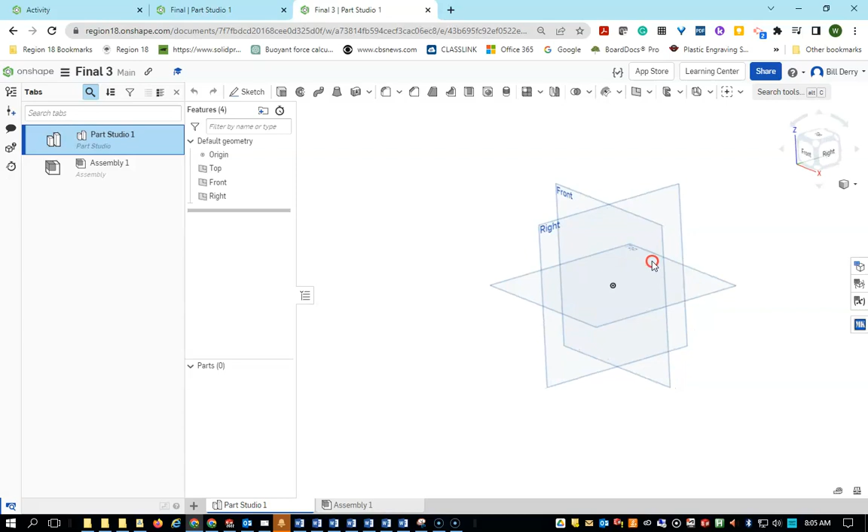All right, so we've got a new part studio here. I want to get drawing for our part. I'm going to start on the right side, so I'm going to grab a sketch and select the right plane. Let's just click on this so that we're looking normal to it. I'm going to show you how I got started here.

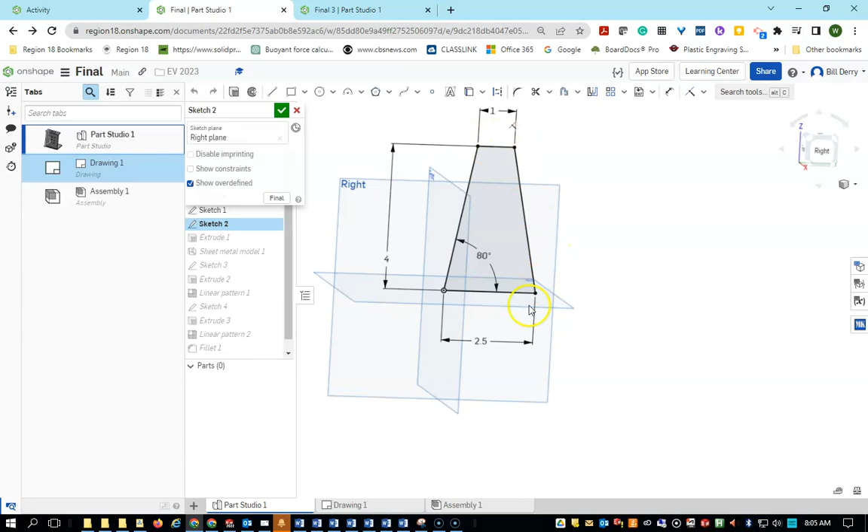I just started with the origin, 80 degrees, 1 inch over, and I made this shape. So we're going to go ahead and do that to get started. This is actually an interesting way to do a sheet metal part.

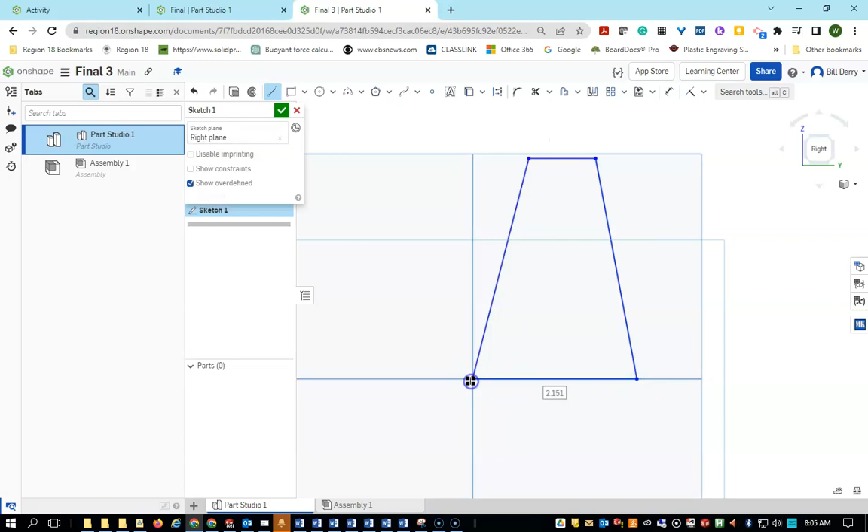So, whoops, drag that line up a little bit. All right, so take this guy over and close that up. All right, we'll come in here with our dimension tool, and this I want it to be 4 inches,

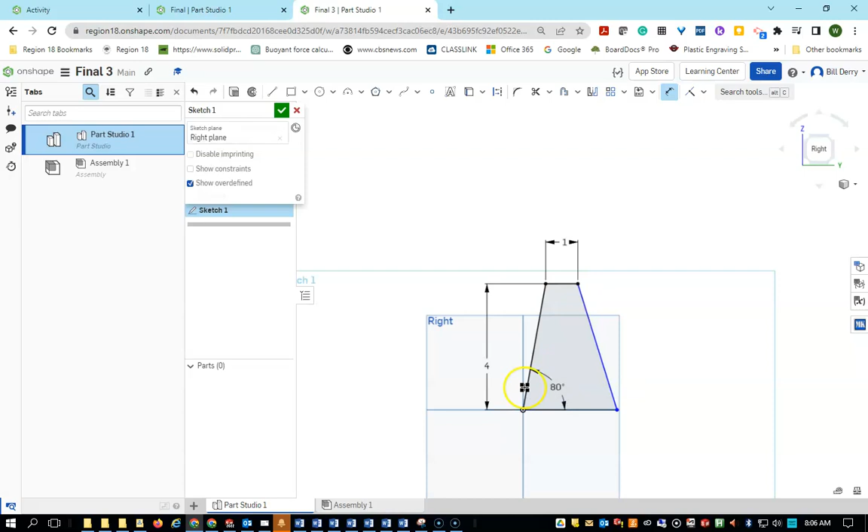and this was going to be 1 inch. This is going to be 80 degrees, and this is going to be, I think, 2.5. All right, so we've got our shape, and we're going to get out of this and jump right into extrude.

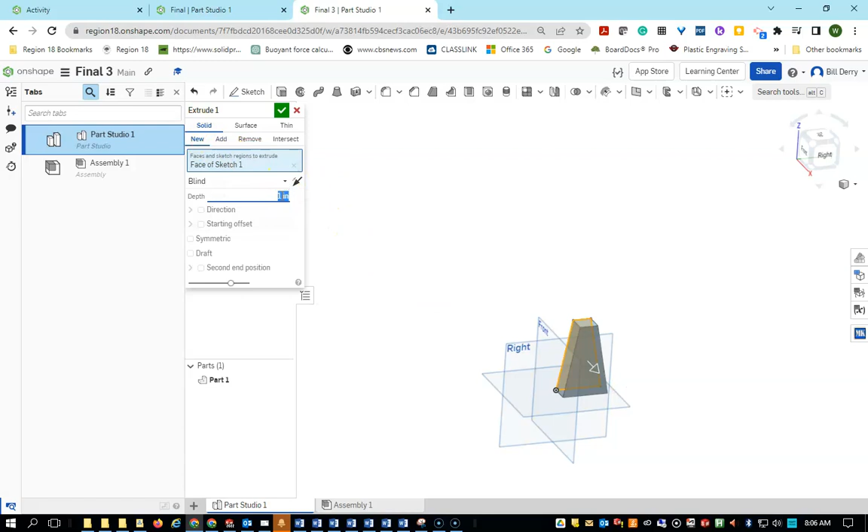Select our shape here, and we're going to go 4 inches. All right, but I want this to be a sheet metal part.

So let me just show you. In the end, this is what we're making. So what I did is take a look at this. We extruded this out. I'm sorry, I guess it was 3.5 inches.

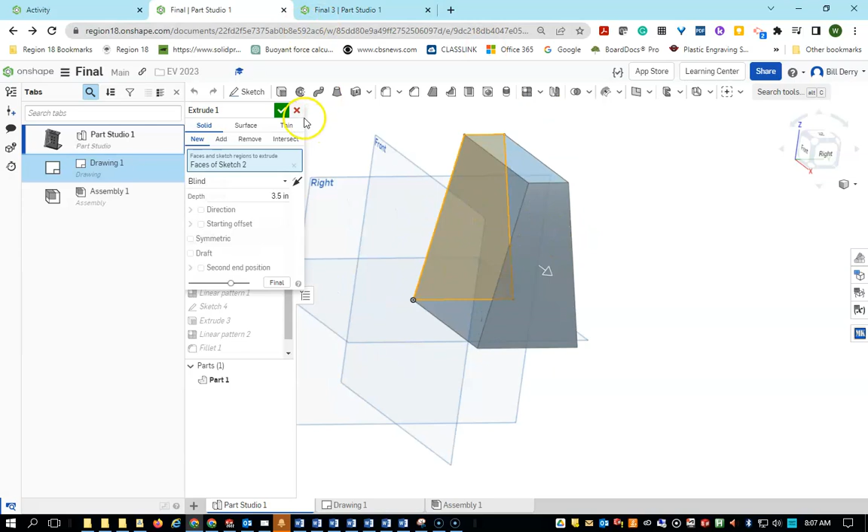Let me go back and change that. So it was 3.5, and then we turned it into a sheet metal part in here by telling it which faces we wanted to keep and where we wanted to put our bends. So these are the faces to exclude, and these are where we wanted our bend lines.

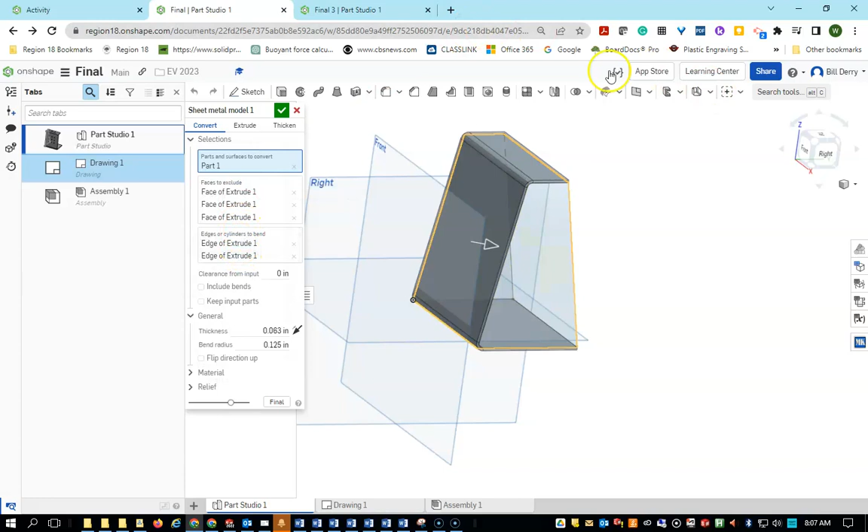So let's go back to this part, and I'm going to edit this because I made it too long, so it's supposed to be 3.5.

All right, and now we're going to jump over here to where it says sheet metal, and I clicked on this guy right here. If that's not available, you might need to dig through there.

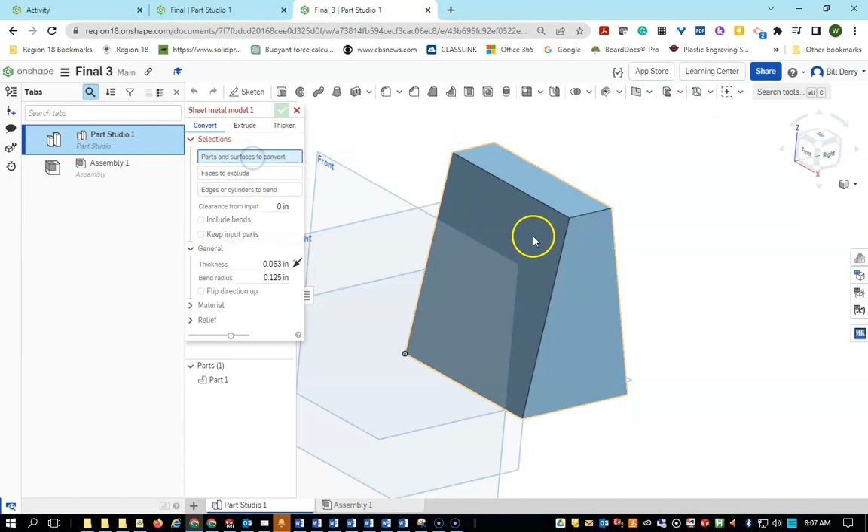So, parts to convert to a sheet metal part, we're going to click on this. All right, and faces to exclude: I don't want this face, or this face. And edges to bend: we want to bend this edge and this edge.

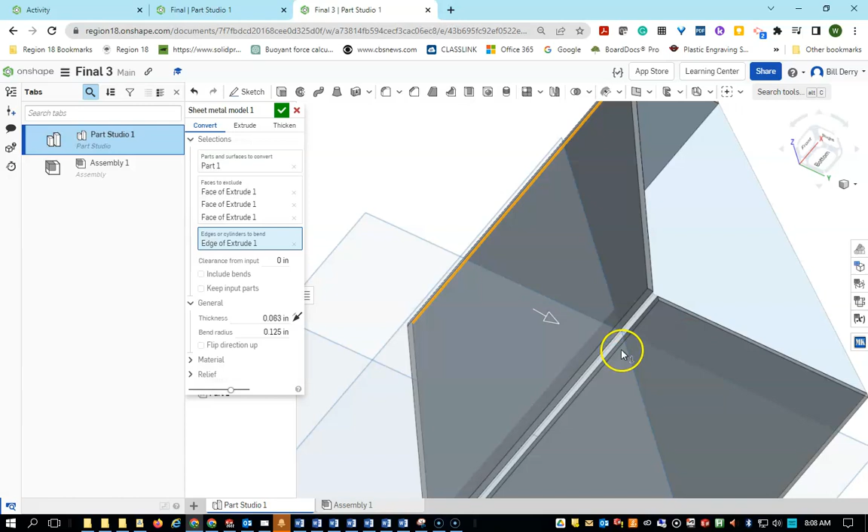And turn it into a sheet metal part, is that simple. Down here, we're going to set our thickness to 1/16 of an inch and our bend radius to 1/8 of an inch. If you haven't done that, you can go in there and do that.

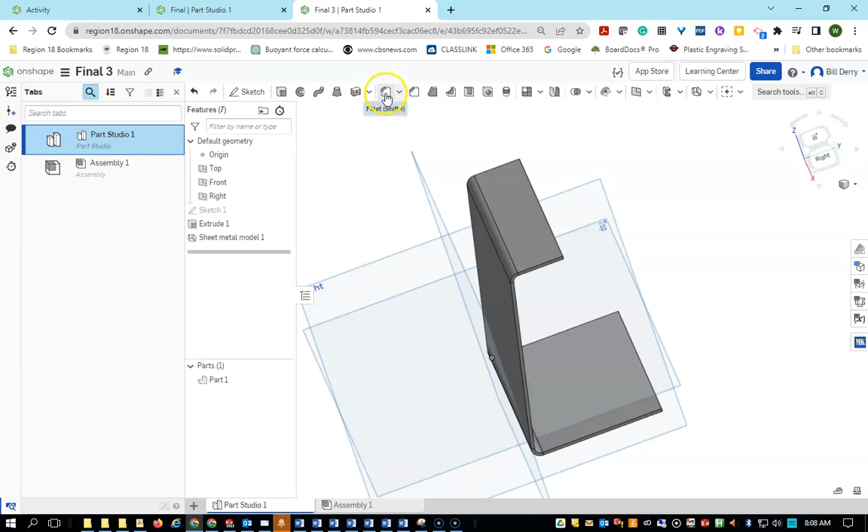So we're part way there. We're going to put some fillets on these corners, and I think those were 1/4 inch. Those are easy, so we'll grab the fillet tool, set it to 1/4 of an inch, and just round these corners.

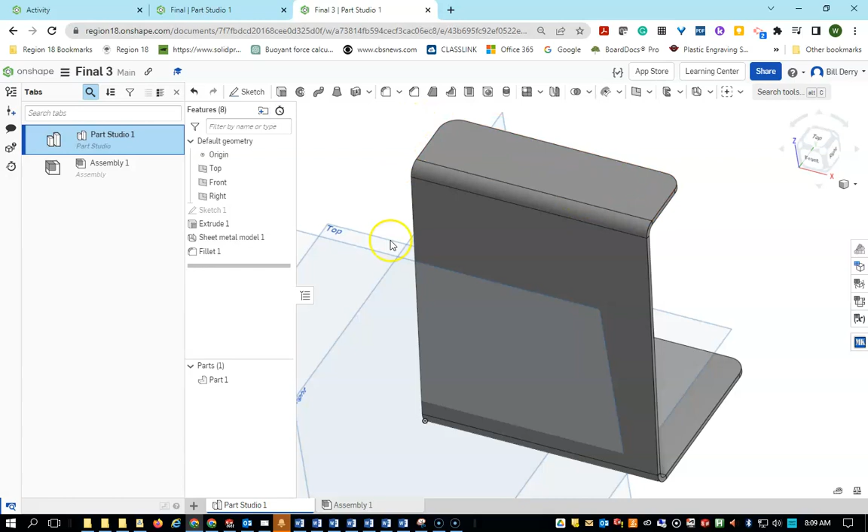Okay, and next we're going to put some holes along the top, and some holes for interest along the front. The holes on the top are going to be the pencil holders, and the holes here are just a pattern to show that you know how to do some layout. So let's take a look at that.

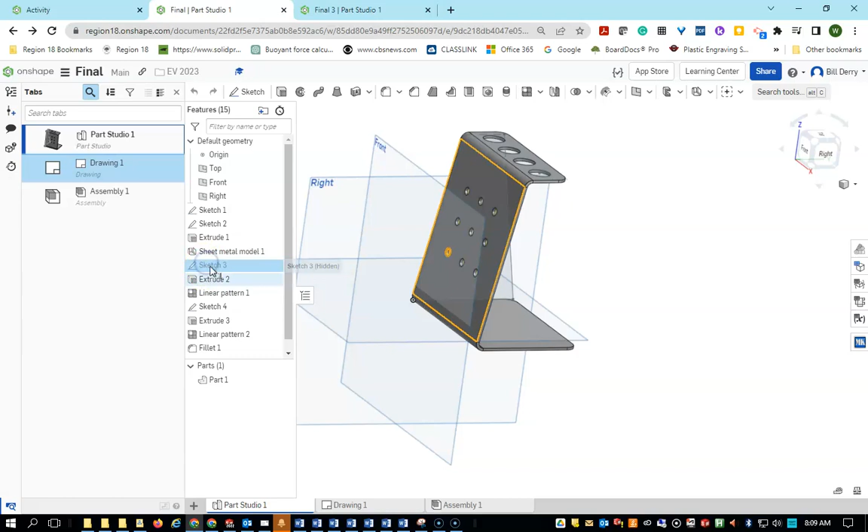So that was, I guess we'll do this one first. So let's take a look at this sketch. And that was 1.5 up and 1 inch in.

So we're going to put a sketch on this face. We're going to draw a circle, and we'll dimension it. I think that was 3/16, if I remember. Yep, and 1 inch in.

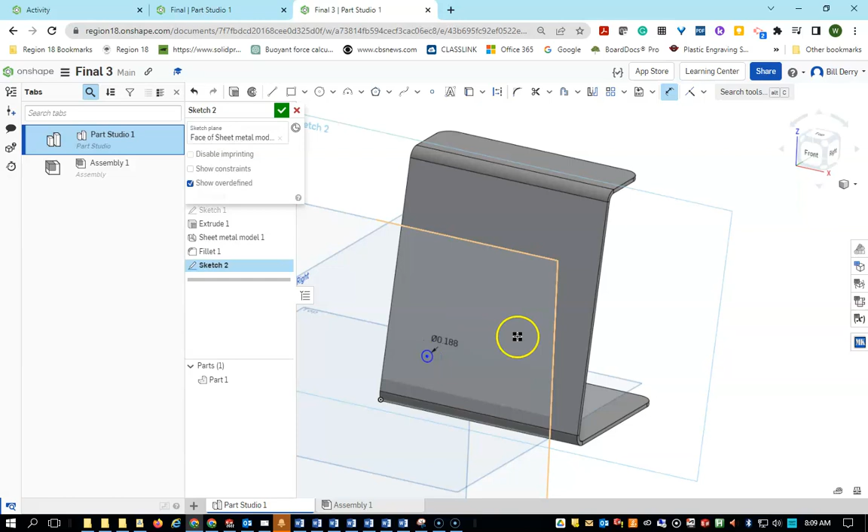Coming from the origin here, 1.5 up. I think that's what I did. All right, so now we can go in and do an extrude. In this case, we want to remove the material.

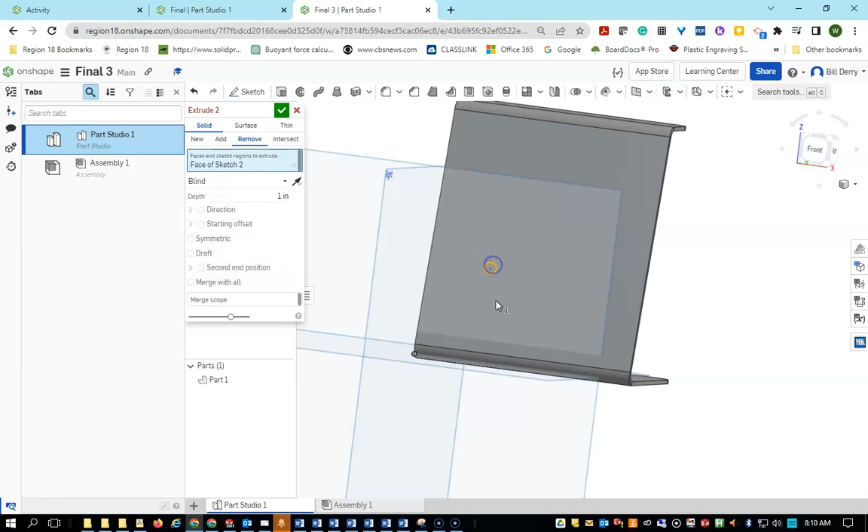We'll select that guy, go through all, hit OK. And now we want to pattern that guy to get the rest of it.

So the goal here is to end up with this 9-hole pattern. I'm just going to go in here and edit this just to show you what I did. So these are 3/4 of an inch apart, 3 of them, and I need to select the two directions.

All right, so it's 3 by 3, and we get to tell it which directions we're going. So that tool is over here, and we're not patterning a part, we're patterning this extrude.

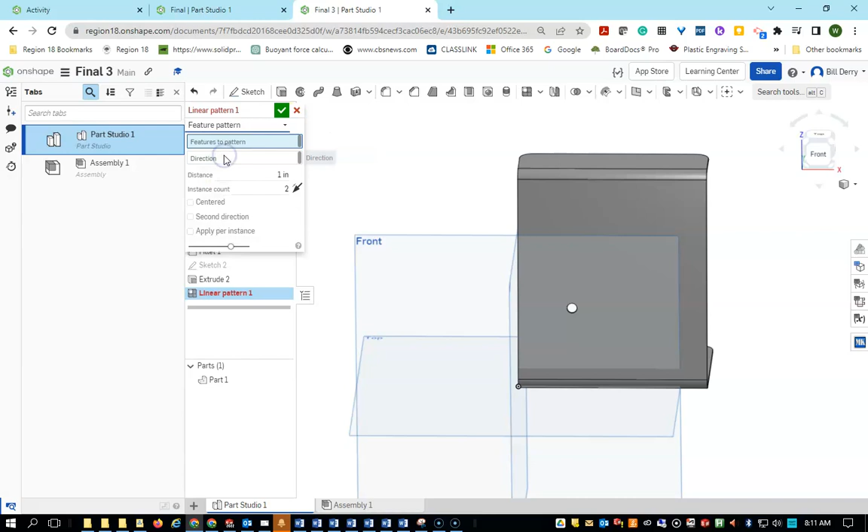So if you click in here, it says parts to pattern. We don't want to do that. We need to change that by going feature to pattern, and this is the feature we want to pattern.

So now it's asking for a direction. Doesn't matter which one we pick first. Oops, I don't want to pick that. Let me get rid of that. I was in the wrong spot. Let me start over again.

Okay, pattern. I don't want to pattern a part, I want a feature. I want it to be this.

So my direction is I'm going to pick this line, and distance is 0.75. Count is 3. I want to change the direction so it's visible.

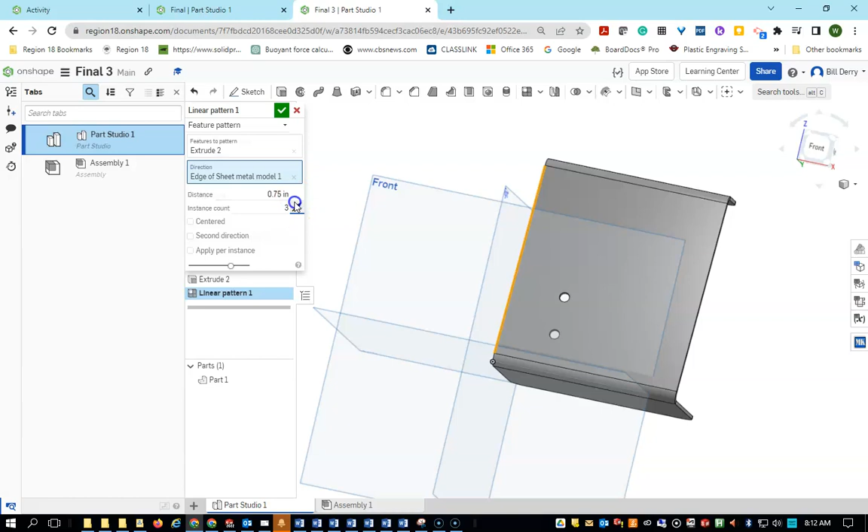All right, second direction, I can pick this line. Again, the distance is 0.75. Count is 3. And I think I need to flip the direction on that one as well. So we should be set with that pattern.

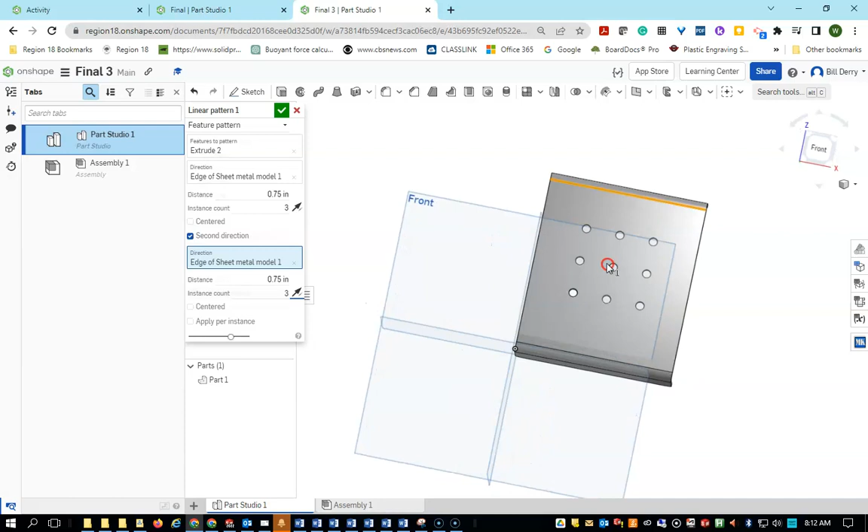Hit OK. Last thing we need to do is put our holes in the top. So I'm going to jump back here just to check my measurements.

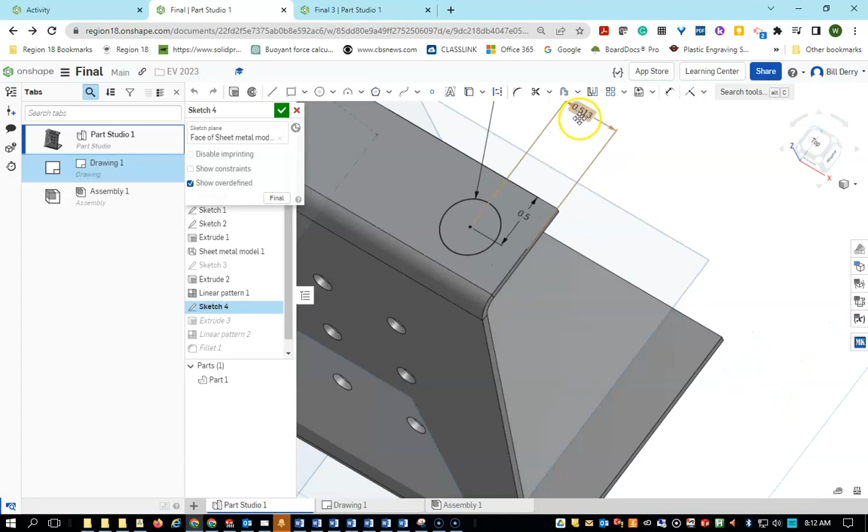So on this sketch, I have a 1/2 inch hole, 1/2 inch in from the edge, and a little bit more than a half here. So let's go ahead and make that sketch.

Sketch tool, select that surface, make a 1/2 inch hole.

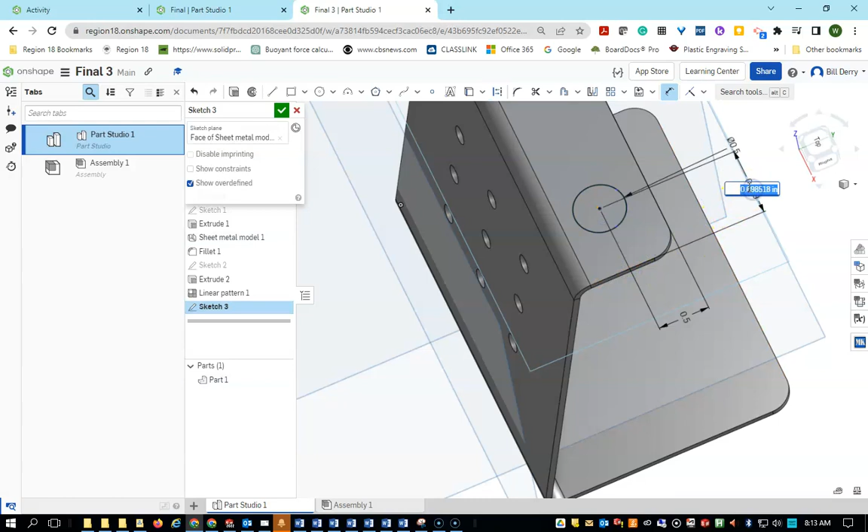We're going to make it a 1/2 inch from the edge this way, and we'll make it just a touch more, just so that it comes out even. So this is 0.5125.

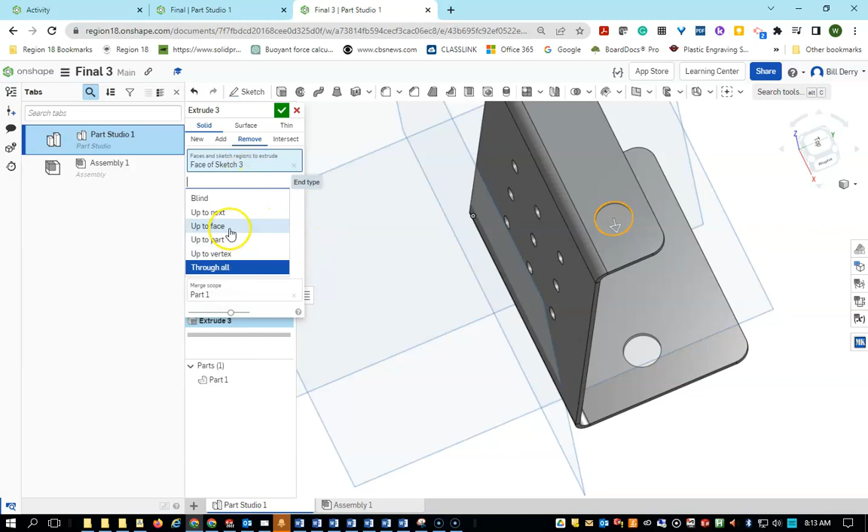Okay, exit that sketch, extrude. We're going to remove through all. Select our, whoops, I don't want to, actually we don't want to go through all, we want to go up to next. There we go. All right, so that takes care of that.

Now we just need to pattern that guy along. This is going to be a single, just a row, so one direction.

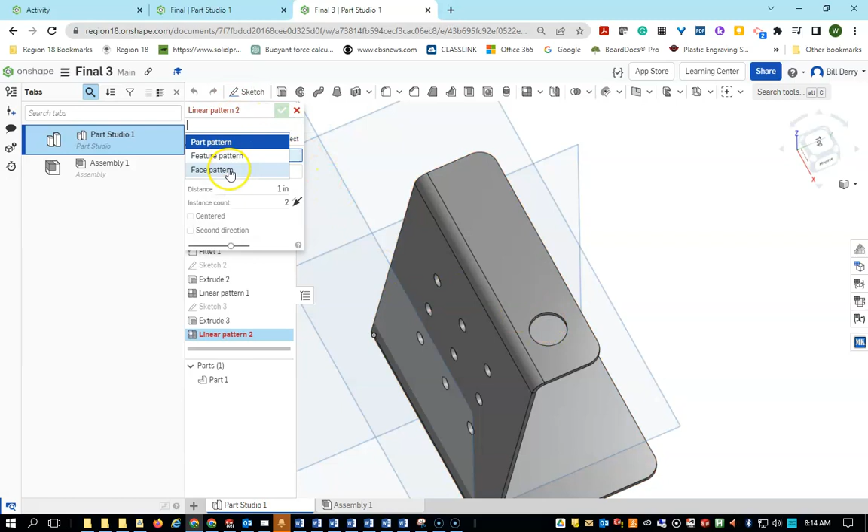So select our entity to pattern. Actually, we got to go, it always goes to part. I don't know why you would think it would be feature, but anyway, that's what we want to pattern.

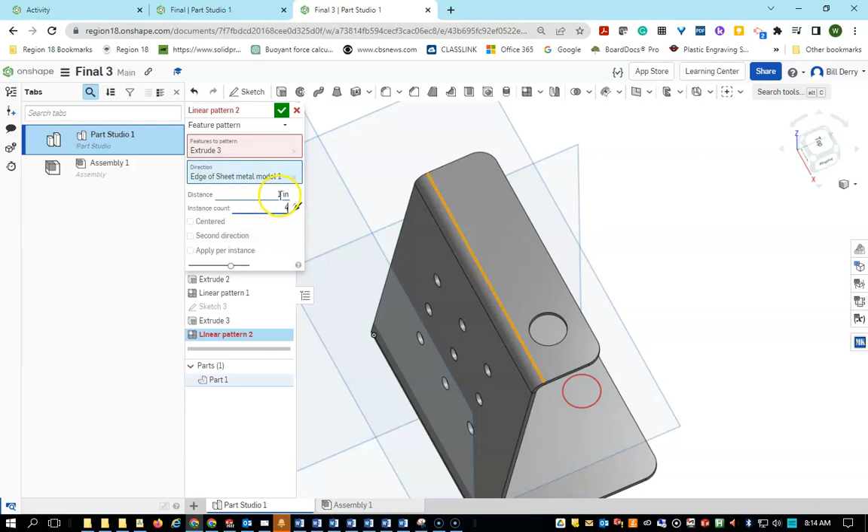Our direction is this, and instance is going to be 4. Distance, I don't remember. It's going the wrong way. I think they were a 1/2 inch apart.